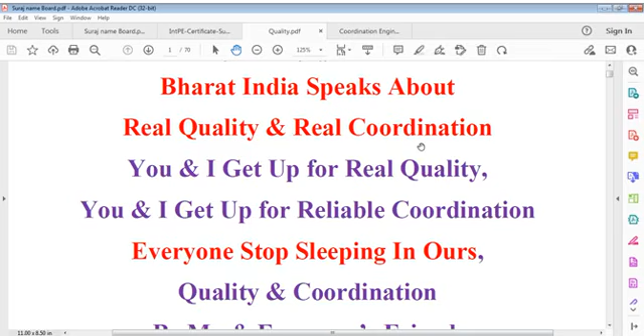It's now quality file Bharat India speaks about. I say every day Bharat India speaks about, but everybody should speak about this because real quality and real coordination are required, and coordination means reliable coordination, engineering projects, public and engineers.

You can say, if we miss real quality, if we miss real coordination, we miss good engineering, and everyone should work on quality. You may be an engineer or otherwise. Quality has to be learned by everybody.

Engineer is born, engineer is supposed to know how to apply quality, and before application one has to know what is the criteria of quality in whatever activity is involved.

We should not stop bad quality. We should stop it. We should question, should we stop or not stop? Answer is we have to stop bad quality.

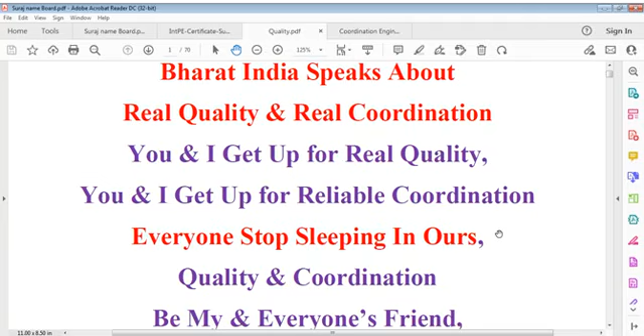We have to start converting every good to good quality before it is being produced. Because without quality your good has got no value. If you don't produce quality goods, there is no export value.

People won't require it. Maybe once they buy your product, keeping in view it's cheaper, or saying let us try, it's like that. But remember, you have to build trust among your customers, and if you do not earn trust, you won't have any market in future.

Trust travels long distance, while mistrust does not travel any distance. Remember, trust travels long distance. Just like a long distance horse race, a horse that can race for long distance - a short distance race has got no meaning.

So everybody should be serious about this issue, because quality and coordination cannot be compromised. Coordination is actually a very much technical engineering activity. Without coordination we cannot do anything.

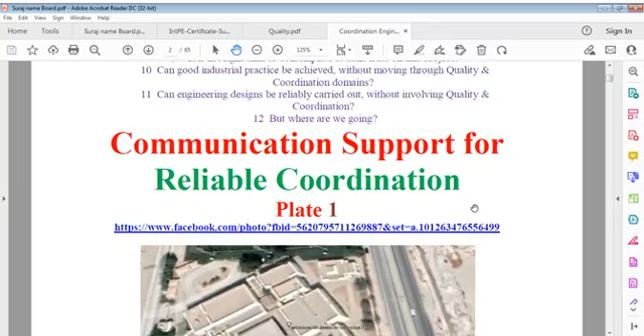The application of information is called quality environment. We fix that, and that's what is required, fixing it. Then we say coordination engineering, as I said before, is communication support, and that is reliable coordination engineering, which is very much important everywhere to be utilized.

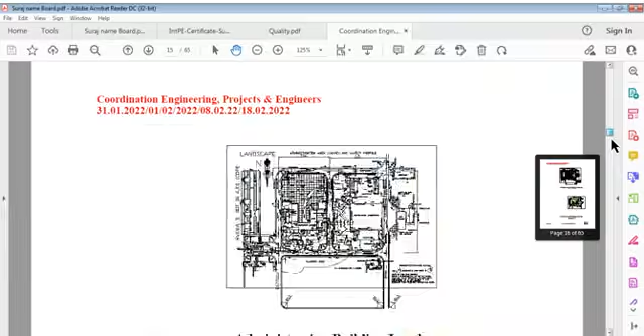It's very easy to say this project has been done, but what's the background of that? That's important - how much work was done, and how much concentration was included. That's a very important point, and that's why I try to explain coordination all the time.

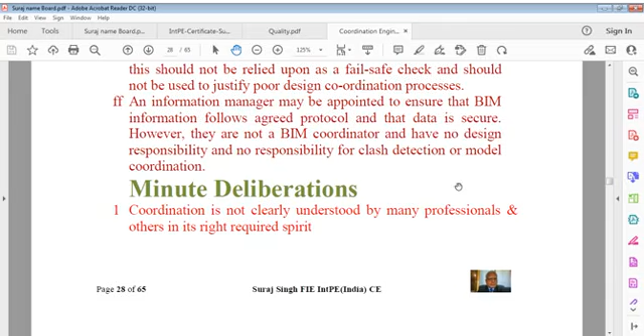Coordination is not clearly understood by many professionals, and its right required spirit is often missed. That point is very important, and the fact remains that without adequate and efficient coordination in professional engineering, works cannot be successfully accomplished.

I can say it shall be right to admit that coordination failure leads to engineering design and construction failure. We have to keep in mind that design and construction failure means complete collapse of the system - everything is lost: material, cost, time, reputation. So everywhere there is loss just for lack of coordination and good engineering information and design.

This means the designer has to be very smart while designing, not confined only to codes or imagination, but should consult people with experience who can give benefit. You should share the benefit of those experiences from people with long experience on sites and works, who know the difficulty while carrying out jobs and activities.

For many engineers I have observed that the issue of coordination remains very delicate, and such engineers try to avoid coordination and its complexity. They just expect someone else to give final working drawings for execution. This means those engineers try to avoid the headache job - they just want complete cooked food for eating.

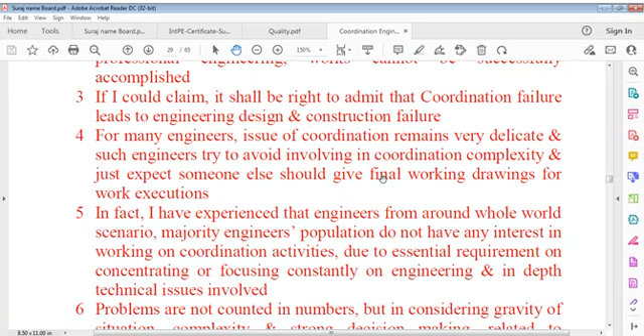This cooking means you give them complete information so that after getting it they study it and hand over the charge to a foreman who can do the job. The issue of coordination is very understandable, and those engineers who can do it are called smart engineers, as far as I know. They should be called smart engineers because it is coordination - as important as taking food.

If you can't take food, you can't work because you don't have energy. The same way, coordination is soul energy, it is spiritual energy for the job. I'm not talking of body's energy, I'm talking of mind energy. Coordination means a fertile mind, coordination means an active mind.

Coordination can be done by those who keep themselves immersed in that work. Once immersion is there, if you find problems, you will certainly get solutions. And if you are not able to get solutions, a specialist will solve it for you, provided that specialist has been given comprehensive coordinated information - that's the sole purpose of coordination.

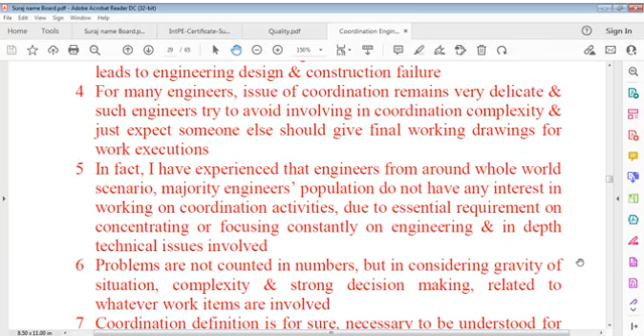I've experienced this from around the world. There are many engineers, and I can say the major population of those engineers do not have any interest in working on coordination activities, due to their respective interests or essential requirements of concentrating and focusing constantly on engineering and in-depth technical issues. These problems cannot be counted in numbers, but in considering the gravity of whatever work items are involved.

The definition of coordination is for sure necessary to be understood for its real meaning, so that no mixing results. You should remember that coordination is done in every profession, in every field - the way may be different, the points may be different.

Where coordination is not done, inefficiency comes in. Nobody knows how work shall be done, so they just beat about the bush and don't come to a point. This means time is lost. You do not know what to do, you keep having meetings, you don't consult the respective or linked person, and then you want to reach agreements. If you try to reach agreement without that, it will be futile work because you do not know what to do. By doing coordination, you will find every required information is available.

And if something is not available, then you can raise that issue. This information must be procured from whatever reliable source. Coordination's definition is for sure necessary to understand. That's how we can understand this.

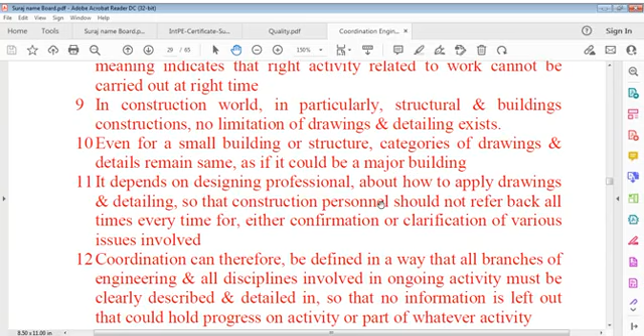That's why being a good practitioner, one should be clear about what is to be done, and coordination is a way. Of course it requires some input from the engineer, but that input is beneficial because it helps you do work faster. And sometimes there are activities which are in parallel to current activities or which are dependent in sequence, and you do not understand what will happen or which will come first. But because you have studied it properly and consulted with the people who will work on it, that dilemma of what to do does not exist.

For coordination therefore, we can say it depends on the designing professional also about how to apply drawings and detailing, so that construction personnel should not refer back all the time, every time, for either confirmation or clarification of various issues involved.

We can say in that case coordination can therefore be defined in a way that all branches of engineering and all disciplines involved in the ongoing activity must be clearly described and detailed, so that no information is left out that could hold up progress on the activity or part of that activity.

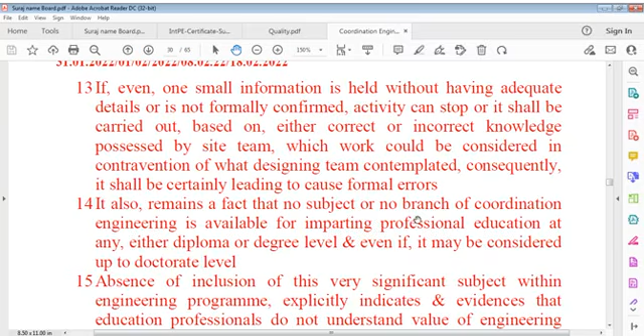If even one small piece of information is held without having adequate details or is not formally confirmed, activity can stop, or it shall be carried out based on either correct or incorrect knowledge possessed by the site team - work which, if done, could be considered in contravention of what the designing team contemplated. Consequently, it shall certainly lead to formal errors. And errors are not positive - errors mean loss of something.

It also remains a fact that no subject or branch of coordination engineering is available for imparting professional education at any diploma or degree level, even up to doctorate level, but coordination is independent of all that. It is a requirement, not a privilege. It's a requirement, it's a mandate.

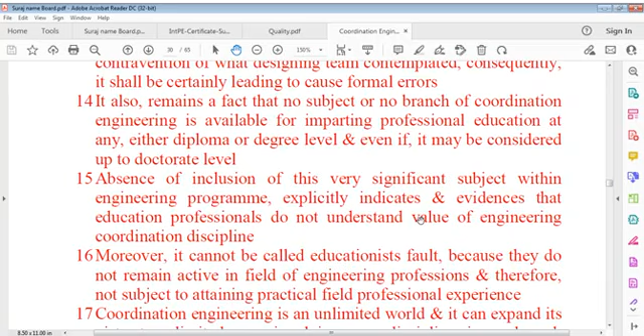It's an understandable mandate, a procedural mandate, and this is very much technical, very much engineering based, and can be logic only - no hypothesis, no imagination. Whatever information we get should be logical, based on some factors. So we can say the absence of inclusion of this significant subject within engineering programs explicitly indicates and evidences that education professionals do not understand the value of engineering coordination as a discipline. I won't say it's the fault of someone, I don't want to go into that.

Coordination - engineering is an unlimited world. It can expand its vistas to unlimited areas, involving many disciplines in one branch of engineering, and also importing various branches of engineering depending on what class of work it is.

And particularly when we deal with contracts, it's very important, because signing a contract is one part, but doing or implementing the contract is another part. There's no specific clause saying you have to do coordination like this - you have to decide yourself and get it in consent with the engineer who is responsible for whatever procedure.

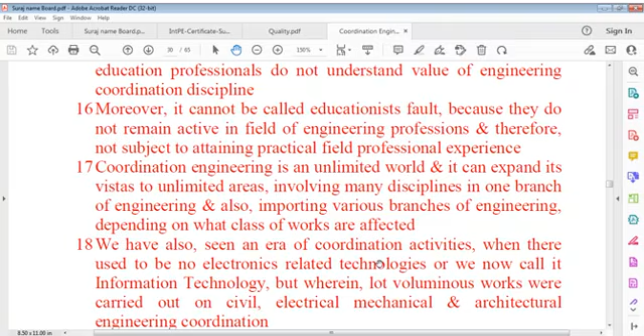Once what you want to do is clear, it can be done easily if it is well understood, and that information can be given to whosoever is responsible for carrying out the job. That's a very important point, particularly on construction or design contracts. There may be design defaults or design faults, and we have to go through that — not to punish someone, but to see that work is done safely and securely, with no repetition. Repetition means you break something and make it again. It doesn't work, and that's why coordination is a very important part in life.

You have to be very careful, and a coordination engineer would have been appointed had the incumbent professional been experienced on a considerable size project site. A professional having just one engineering discipline's knowledge could not be successful for efficient working on site, and progress is consequently either marred or errors are caused.

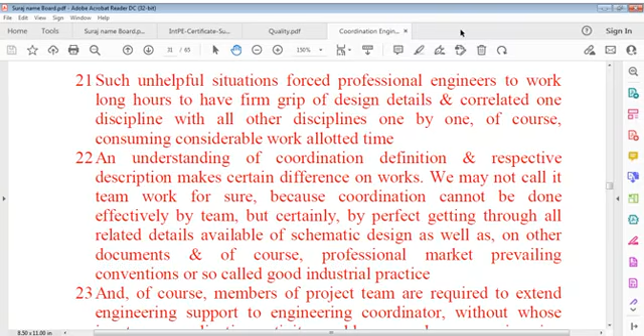Such an unhelpful situation forces professional engineers to work long hours to have a firm grip of design details, correlating one discipline with other disciplines one by one, consuming considerable allotted work time. Understanding coordination's definition and respective description makes a certain difference.

Works cannot be done effectively by a team except by getting a perfect grip through all related details available in schematic designs as well as other documents, and of course the professional market's prevailing conventions, or so-called good industrial practice.

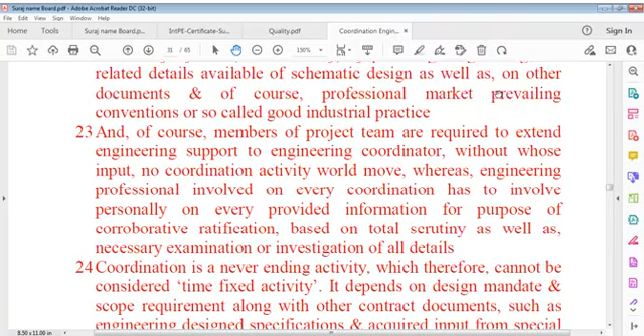Members of the project team are required to extend engineering support to the engineering coordinator, without whose input no coordination activity will move. The engineering professional involved in coordination has to be involved personally in every piece of provided information, for corroborative ratification based on total scrutiny, examination, or investigation of all details. Coordination is a never-ending activity which cannot be considered a time-fixed activity.

It depends on the design mandate and scope requirement, along with other contract documents such as engineering design specifications, and acquired input from special materials and manufacturers, such as documented instructions and material data studies. The complexities of technicalities and structure of resources have certainly created additional complexities.

When many disciplines or branches of engineering work together, it forces attention from the coordinating professional to look into all requirements — contract-related, industry-related, as well as codes-mandate related. In fact, coordination at a higher level of responsibility is always a voluminous task.

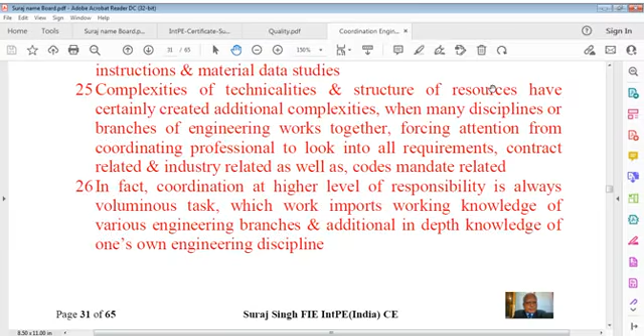This work imports working knowledge of various engineering branches, plus additional in-depth knowledge of one's own engineering discipline. It's also true that in the current engineering and advanced project scenario, just depending on certain proclaimed software may not be absolutely assistive to automatically resolve details pertinent to various conflicts among disciplines. Therefore, no blind eyes can be allowed to thrust the outcome of various conflicting details into physically workable solutions.

As many items or components of whatever project invite an equivalent, additional, or augmentative level of coordination for all such designs and their respective detailing applications.

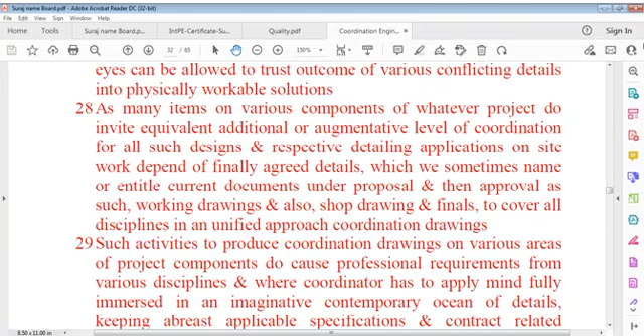On-site work depends on finally agreed details, which we sometimes name or entitle current documents — under proposal and then approval — as working drawings, shop drawings, and finally, to cover all disciplines in a unified approach, coordination drawings.

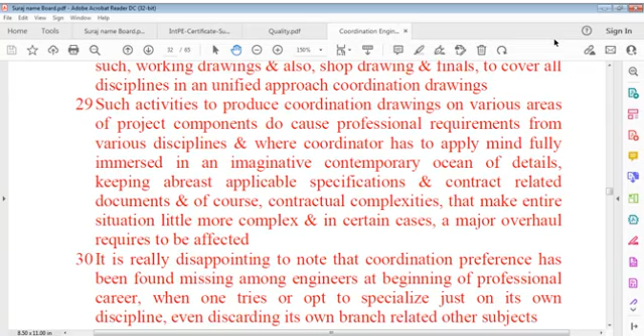Such activities to produce coordination drawings on various areas of project components require the coordinator to apply his mind, fully immersed in an imaginative, contemporary ocean of details, keeping abreast of applicable specifications and contract-related documents. Contractual complexities make the entire situation a little more complex, and in certain cases a major overhaul is required to be effected.

It is really disappointing to note that coordination preference has been found missing among engineers at the beginning of their professional career, when one tries or opts to specialize just in its own discipline, even discarding its own branch-related other subjects.

It's of course necessary for a professional to attain a certain specialization level, but simultaneously one must move on parallel tracks with the remaining disciplines and certainly try to join with other engineering branches, overlapping them.

At this stage of conferring, I shall like to infer with entitled terms such as specialist engineers, managers, organizers, as well as others.

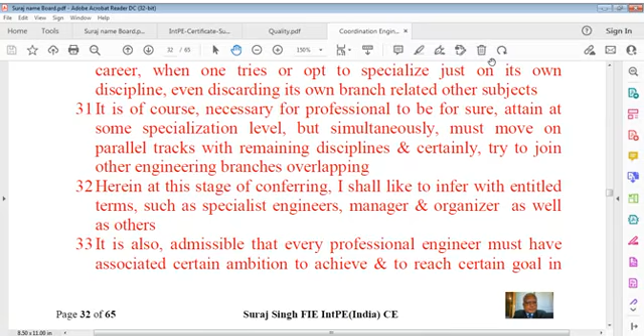It's also admissible that every professional engineer must have a certain ambition to achieve and to reach a certain goal in the professional world. But that does not mean such a professional shall have to leave all other aspects that apply within the profession for cohesive working.

Focus should not find any final stop, but continuation of specialization and then additional working specialization, as major requirements in the engineering profession, because engineering cannot be replaced or overtaken by any other non-engineering professional.

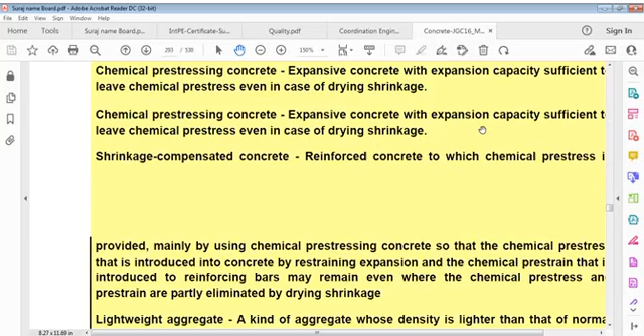First time, now let me see the time factor also. It's about 22 minutes only. Oh, it is. 48 minutes, I'm sorry, there's some error here. Still signals being problematic, some signals again came.

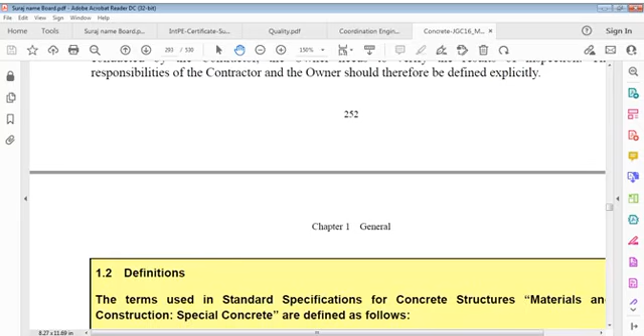So here I give you some definitions. It's page 293. Let me see what's written. Constructing special concrete, discussed on materials and construction. Special concrete frequently requires professional skills. It is stipulated that special concrete should be constructed under guidance of professional engineers with adequate knowledge and experience concerning specific types of special concrete.

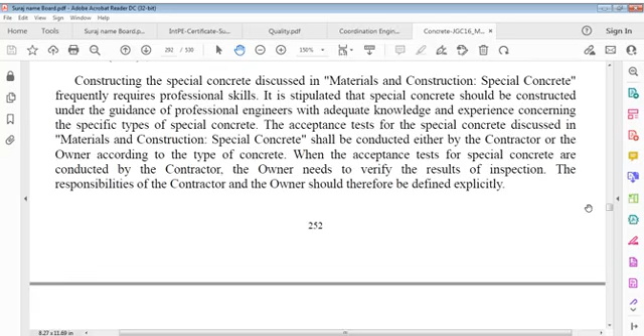Acceptance tests for special concrete discussed in materials and construction. Special concrete shall be conducted either by contractor or owner according to type of concrete. When acceptance tests for special concrete are conducted by contractor, the engineer or owner needs to verify results of inspection. Responsibilities of contractor and owner should therefore be defined explicitly.

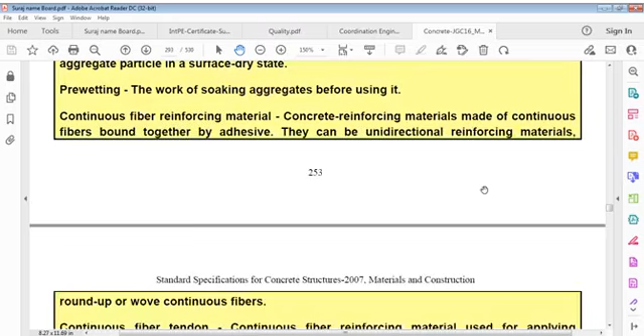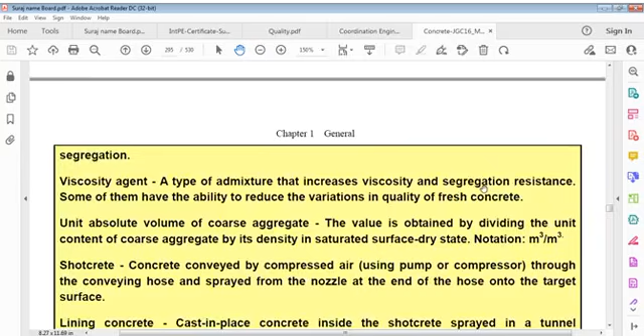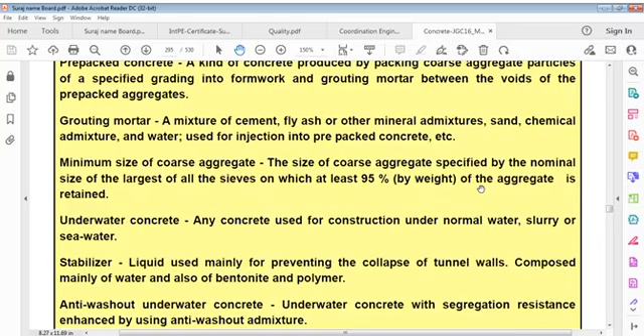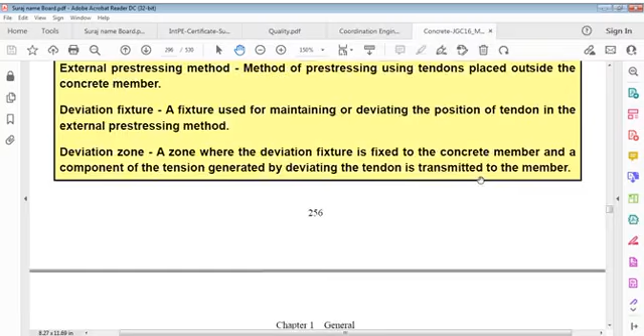Expansive concrete, admixture, chemical pre-stress, chemical pre-strain, shrinkage compensation concrete, chemical pre-stressing concrete, shrinkage compensated concrete, lightweight aggregate concrete, surface dry state of lightweight aggregate, specific gravity of surface dry lightweight aggregate, pre-wetting, continuous fiber reinforcing material, continuous fiber tendon, continuous fiber binder, short fiber reinforced concrete, steel fiber reinforced concrete, synthetic fiber reinforced concrete, short fiber content, steel fiber content, tension, softening curve, explosive fracture, unit volume of dry-rodded coarse aggregate, high fluidity concrete, self-compactability, segregation resistance, flow ability, pass ability, viscosity agent, unit absolute volume, shotcrete, lining concrete, wet spraying, dry spraying, set accelerating agent, percentage of rebound, dust concentration, pre-packed concrete, grouting mortar, minimum size of coarse aggregate, underwater concrete, stabilizer, anti-washout underwater concrete, underwater washout resistance, test piece made in water, test piece made in air, strength ratio of underwater concrete, pre-stress concrete, pre-stressing steel, pre-stress, tendon, duct, sheath, anchorage fixture, pre-tensioning, post-tensioning, grout for pre-stress concrete, internal pre-stressing method, external pre-stressing method, deviation fixture, deviation zone, concrete product, moist curing, insulated curing, accelerated curing, steam curing at atmospheric pressure, autoclave curing, centrifugal compaction, casting, instant demolding, hot concrete.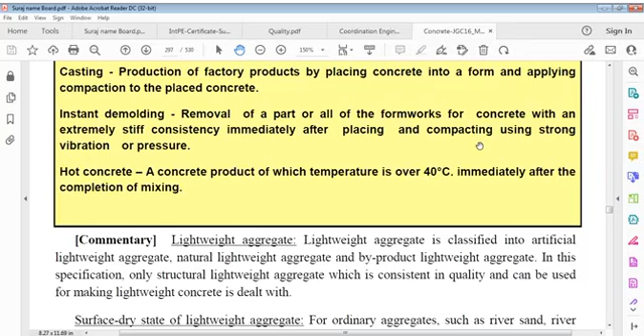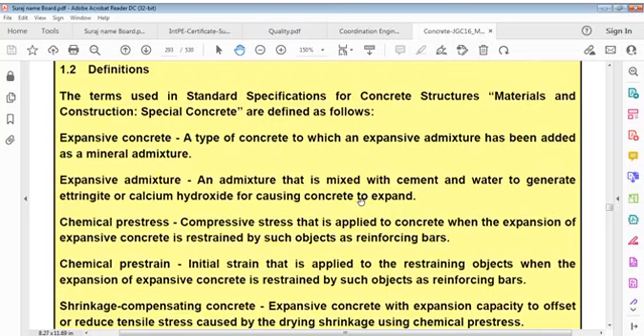Chemical pre-stress is the compressive stress that is applied to concrete when expansion of expansive concrete is restrained by such objects as reinforcing bars. Chemical pre-strain is applied to restraining objects when expansion of expansive concrete is restrained by such objects as reinforcing bars.

Shrinkage compensating concrete is expansive concrete with expansion capacity to offset or reduce tensile stress caused by drying shrinkage, using chemical pre-stress. That is stress shrinkage compensating concrete. Then chemical pre-stressing concrete.

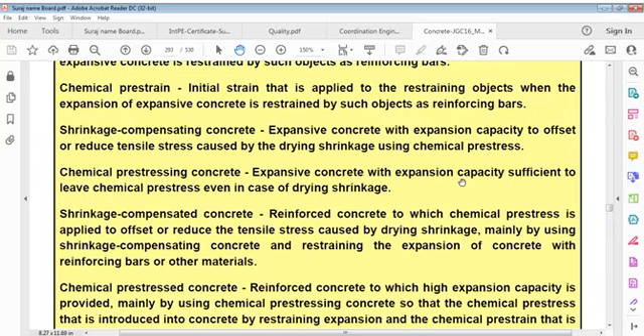Chemical pre-stressing concrete is expansive concrete with expansion capacity sufficient to leave chemical pre-stress even in case of drying shrinkage. Shrinkage compensated concrete is reinforced concrete to which chemical pre-stress is applied.

Shrinkage compensated concrete means reinforced concrete to which chemical pre-stress is applied to offset or reduce tensile stress caused by drying shrinkage, mainly by using shrinkage compensating concrete and restraining expansion of concrete with reinforcing bars or other materials. Chemical pre-stressed concrete is reinforced concrete to which high expansion capacity is provided, mainly by using chemical pre-stressing concrete.

Chemical pre-stress is introduced into concrete by restraining expansion, and chemical pre-strain that is introduced to reinforcing bars remains even where chemical pre-stress and pre-strain are partly eliminated by drying shrinkage.

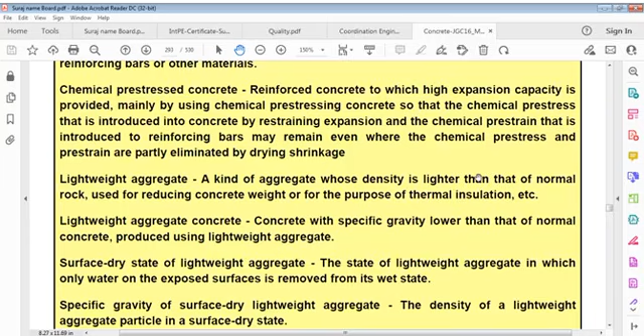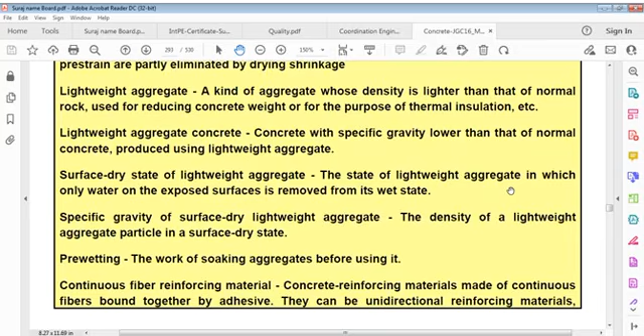Lightweight aggregate is a kind of aggregate whose density is lighter than that of normal rock, used for reducing concrete weight or for purpose of thermal insulation, etc. Lightweight aggregate concrete is concrete with specific gravity lower than that of normal concrete, produced using lightweight aggregate.

Surface dry state of lightweight aggregate is the state of lightweight aggregate in which only water on the exposed surface is removed from its wet state. Specific gravity of surface dry lightweight aggregate is the density of a lightweight aggregate particle in a surface dry state.

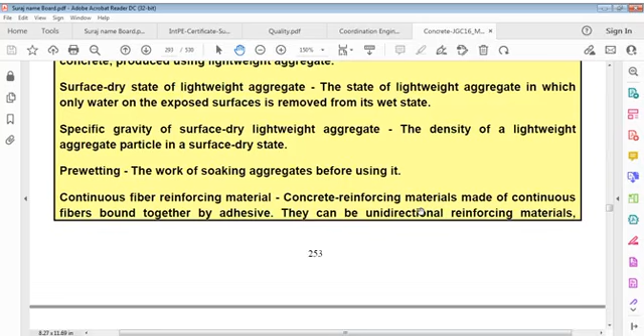Pre-wetting is the work of soaking aggregates before using them. Continuous fiber reinforcing material—pre-wetting, again, was the work of soaking aggregates before using it.

Continuous fiber reinforcing material: concrete reinforcing materials made of continuous fibers bound together by adhesive. They can be unidirectional reinforcing materials, round up, or woven continuous fibers. Continuous fiber tendon is continuous fiber reinforcing material used for applying pre-stress on concrete.

Continuous fiber for reinforcing concrete, such as carbon fiber, aramid fiber, and glass fiber.

Fiber binder that solidifies fibers, plastics such as epoxy resin and vinyl ester resins.

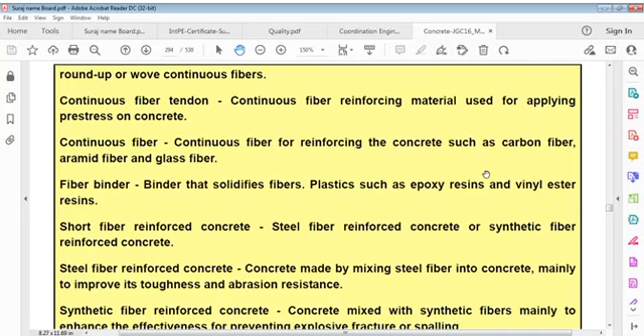Short fiber reinforced concrete, steel fiber reinforced concrete, or synthetic fiber reinforced concrete. Steel fiber reinforced concrete is made by mixing steel fiber into concrete, mainly to improve its toughness and abrasion resistance.

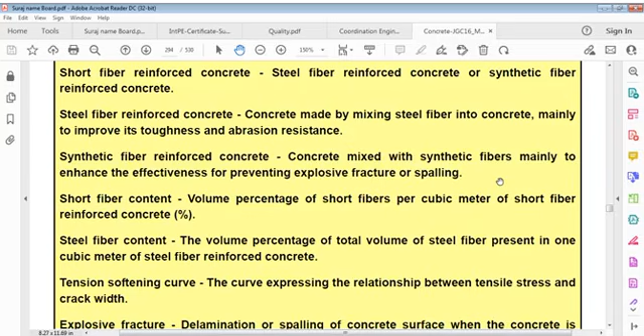Synthetic fiber reinforced concrete: concrete mixed with synthetic fiber, mainly to enhance effectiveness of preventing explosive fracture or spalling.

Short fiber content: volume percentage of short fibers per cubic meter of short fiber reinforced concrete. Steel fiber content: volume percentage of total volume of steel fiber present in 1 cubic meter of steel fiber reinforced concrete. Tension softening curve expresses the relationship between tensile stress and crack width.

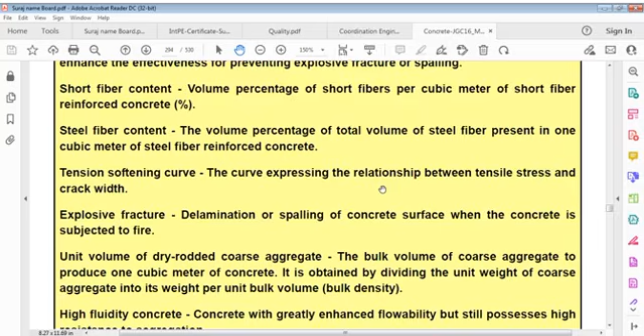Explosive fracture, delamination, or spalling of concrete surface when concrete is subject to fire.

Unit volume of dry rodded coarse aggregate: bulk volume of coarse aggregate to produce 1 cubic meter of concrete. It's obtained by dividing unit weight of coarse aggregate into its weight per unit bulk volume.

High fluidity concrete with greatly enhanced flowability but still possesses high resistance to segregation. Self-compactability: property of fresh concrete to uniformly fill all corners of formwork by its own weight without requirement of external compaction.

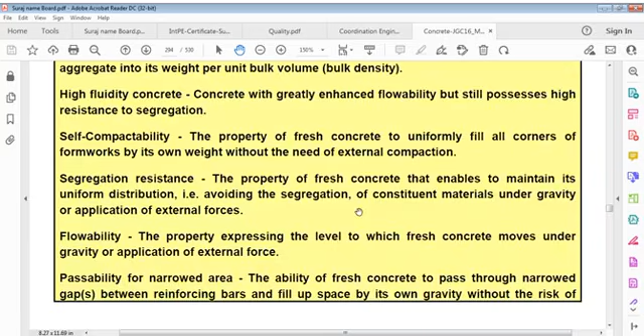Segregation resistance is property of fresh concrete that enables it to maintain its uniform distribution, that is, avoiding segregation of constituent materials under gravity or application of external forces.

Flowability: property expressing the level to which fresh concrete moves under gravity or application of external forces.

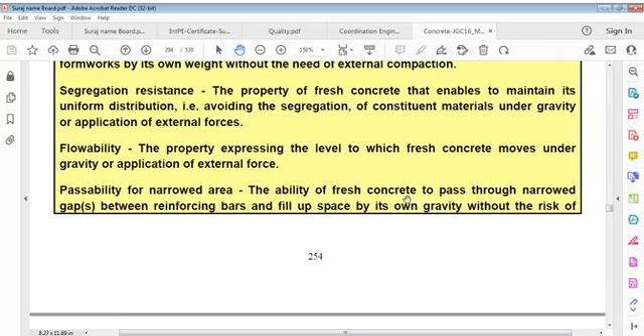Passability for narrowed areas: ability of fresh concrete to pass through narrowed gaps between reinforcing bars and fill up space by its own gravity without risk of segregation.

Viscosity agent: a type of admixture that increases viscosity and segregation resistance. Some of them have the ability to reduce variations in quality of fresh concrete.

Unit absolute volume of coarse aggregate: value is obtained by dividing unit content of coarse aggregate by its density in saturated surface dry state, that is, meter cube per meter cube.

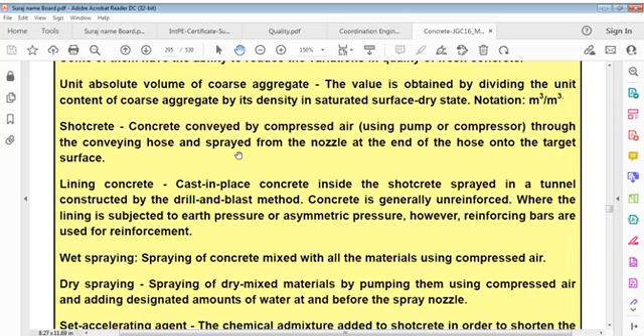Shotcrete: concrete conveyed by compressed air using pump or compressor through conveying hose and sprayed from nozzle at end of hose onto target surface.

Lining concrete: cast in place concrete inside shotcrete sprayed into a tunnel constructed by drill and blast method. Concrete is generally unreinforced where lining is subjected to earth pressure or asymmetric pressure. However, reinforcing bars are used for reinforcement.

Wet spraying is spraying of concrete mixed with all materials using compressed air. Dry spraying is spraying of dry mixed materials by pumping them using compressed air and adding designated amounts of water at and before the spray nozzle.

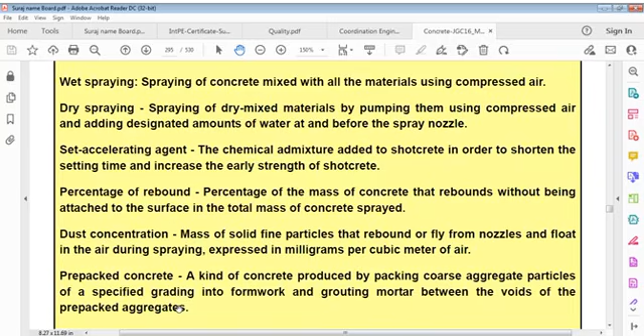Dry spraying is spraying of dry mixed material by pumping them using compressed air and adding designated amount of water before the spray nozzle. Set accelerating agent is chemical admixture added to shotcrete in order to shorten setting time and increase early strength of shotcrete. Percentage of rebound is the percentage of mass of concrete that rebounds without being attached to surface in total mass of concrete sprayed.

Dust concentration: mass of solid fine particles that rebound or fly from nozzles and float in air during spraying, expressed in milligrams per cubic meter of air.

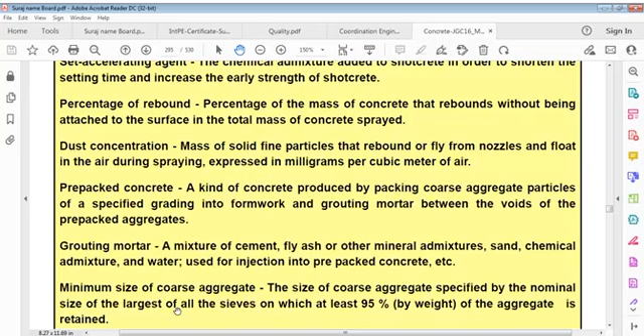Prepared pre-packed concrete: a kind of concrete produced by packing coarse aggregate particles of a specified grading into formwork and grouting mortar between voids of pre-packed aggregate. Grouting mortar: a mixture of cement, fly ash or other mineral admixtures, sand, chemical admixture and water used for injection into pre-packed concrete.

Minimum size of coarse aggregate: size of coarse aggregate specified by nominal size of the largest of all sieves on which at least 95% by weight of aggregate is retained.

Underwater concrete: concrete used for construction under fresh water, slurry or seawater.

Stabilizer: liquid used mainly for preventing collapse of tunnel walls, composed mainly of water and also of bentonite and polymer.

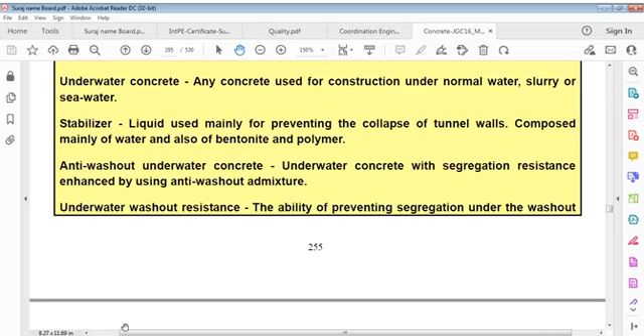Underwater washout resistance: ability of preventing segregation under the washout action of water.

Test piece made in water: test piece made by dropping anti-washout underwater concrete into a mold placed underwater as specified.

Test piece made in air: test piece made by filling anti-washout underwater concrete into a mold in air, as specified.

Strength ratio of underwater concrete to normal concrete: compressive strength of test piece made in water to test piece made in air at the same age.

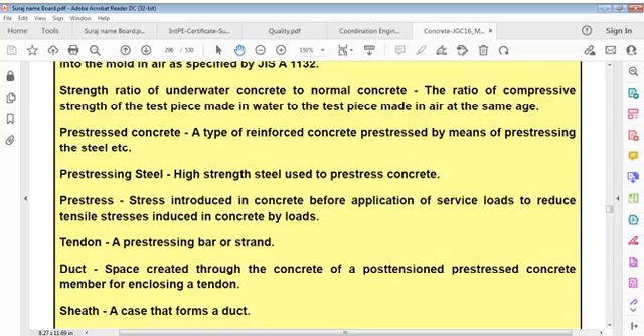Pre-stress concrete: a type of reinforced concrete, pre-stressed by means of pre-stressing steel. Pre-stressing steel means high strength steel used to pre-stress concrete. Pre-stress is stress introduced into concrete before application of service loads, to reduce tensile stresses induced in concrete by loads.

Tendon: a pre-stressing bar or strand. Duct: space created through concrete of a post-tension pre-stress concrete member for enclosing a tendon.

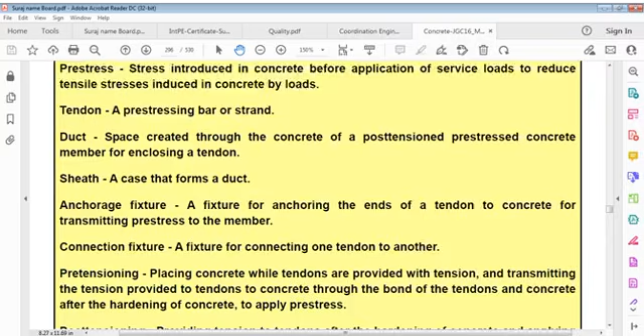Sheath: a case that forms a duct.

Anchorage fixture: a fixture for anchoring ends of tendon to concrete for transmitting pre-stress to the member. Connection fixture: a fixture for connecting one tendon to another.

Pre-tensioning: placing concrete while tendons are provided with tension, and transmitting the tension provided to tendons to the concrete through bond of tendons and concrete after hardening of concrete, to apply pre-stress.

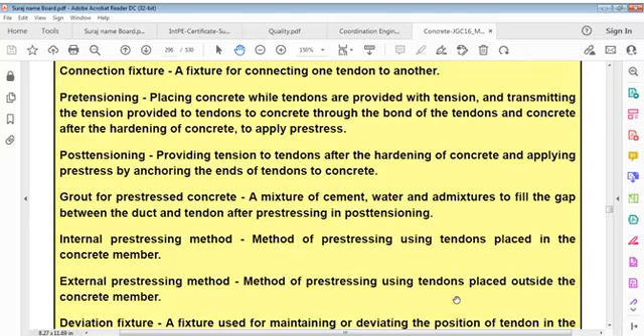Grout for pre-stress concrete: a mixture of cement, water and admixtures used to fill the gap between duct and tendons after pre-stressing in post-tensioning.

Internal pre-stressing method: method of pre-stressing using tendons placed in the concrete member.

Deviation fixture: a fixture used for maintaining or deviating the position of tendon in external pre-stressing method. Deviation zone: a zone where the deviation fixture is fixed to the concrete member, and a component of tension generated by deviating the tendon is transmitted to the member.

Concrete product: precast concrete products manufactured in succession in controlled factories.

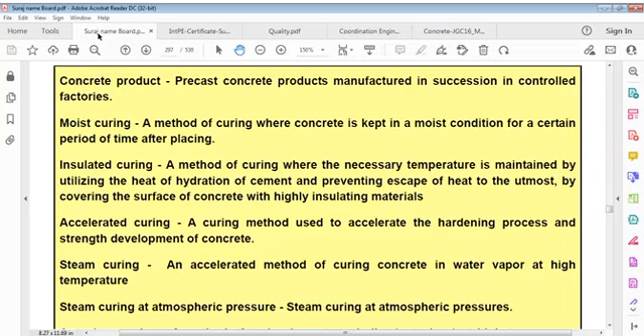Accelerated curing: a curing method used to accelerate the hardening process and strength development of concrete.

Steam curing: an accelerated method of curing concrete in water vapor at high temperature. Steam curing at atmospheric pressure refers to steam curing conducted at atmospheric pressure.

Autoclave curing: a method of curing in a steam boiler, called an autoclave, at high temperature and high pressure. To summarize: steam curing is an accelerated method of curing in water vapor at high temperature; steam curing at atmospheric pressure occurs at normal pressure; and autoclave curing occurs in a steam boiler at high pressure and high temperature.

Centrifugal compaction: compaction of concrete by centrifugal force, using a formwork revolving at an extremely high speed.

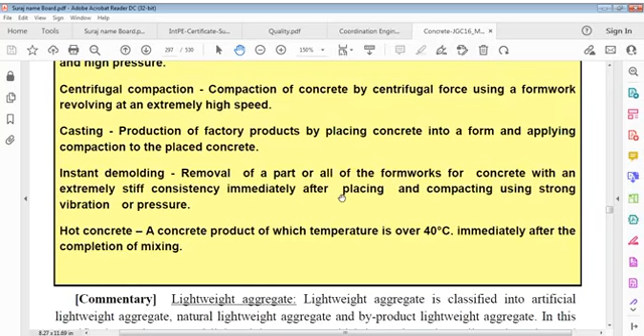Some commentary in this connection: lightweight aggregate is classified into artificial lightweight aggregate, natural lightweight aggregate, and byproduct lightweight aggregate. In this specification, only structural lightweight aggregate, which is consistent in quality and can be used for making lightweight aggregate concrete, is dealt with.

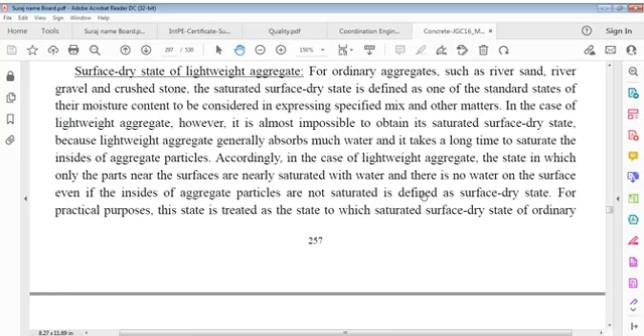Surface dry state of lightweight aggregate. For ordinary aggregates such as river sand, river gravel, and crushed stone, saturated surface dry state is defined as one of the standard states of moisture content to be considered in expressing specified mix and other matters. In case of lightweight aggregate, however, it is almost impossible to obtain its saturated surface dry state.

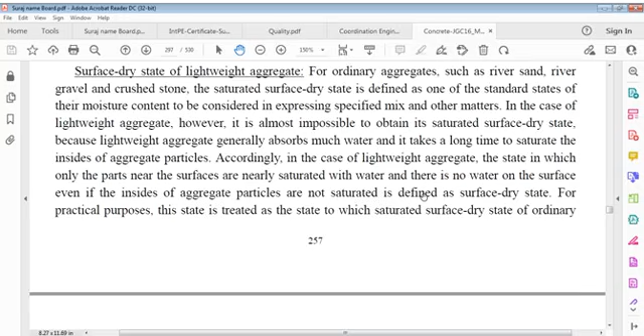Because lightweight aggregate generally absorbs much water and it takes a long time to saturate insides of aggregate particles, a state in which only parts near surfaces are nearly saturated with water, with no water on the surface, even if the inside of aggregate particles are not saturated, is defined as surface dry state. For practical purposes, this state corresponds to the saturated surface dry state of ordinary aggregate. Surface dry state of lightweight aggregate is not constant, and it shall be noted that specific gravity in a surface dry state varies depending on degree of water saturation.

Pre-wetting: aggregates in dry state absorb water of concrete during mixing and transporting. In order to minimize the degree of water absorption, it is necessary to conduct work of soaking aggregate in water before using it. This operation is called pre-wetting.

Continuous fiber reinforcing material is the generic name of a material made of continuous fibers tied together by fiber binder for use as reinforcing material in concrete instead of steel bars or pre-stressing tendons. Continuous fibers include carbon fiber, aramid fiber, glass fiber, or Vinylon fiber.

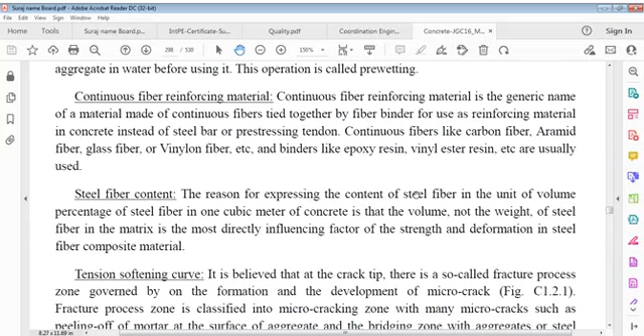Steel fiber content: the reason for expressing content of steel fiber in unit of volume percentage of steel fiber in 1 cubic meter of concrete is that volume, not weight, of steel fiber in the matrix is the most directly influencing factor of strength and deformation in steel fiber composite material.

Tension softening curve. It is believed that at the crack tip there is a so-called fracture process zone governed by the formation and development of micro cracks. The fracture process zone is classified into a micro cracking zone with many micro cracks, such as peeling of mortar at the surface of aggregate, and a bridging zone with aggregates or steel fibers laying across the crack.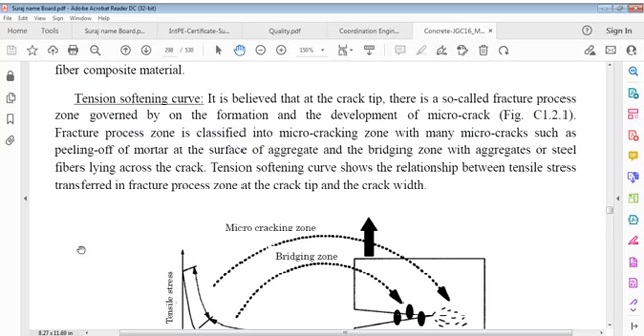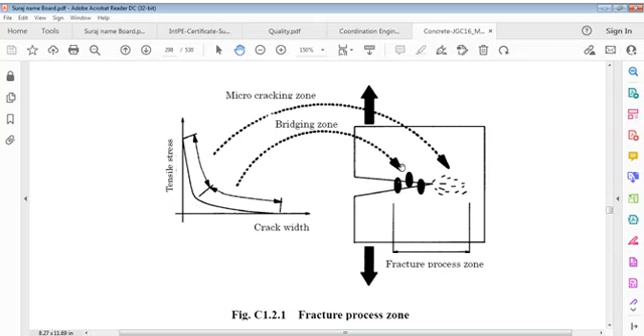Tension softening curve shows the relationship between tensile stress transferred in the fracture process zone at the crack tip and crack width. As crack width increases, tensile stress decreases; least width means highest tensile stress. There are two zones: the micro cracking zone and the bridging zone, both within the fracture process zone.

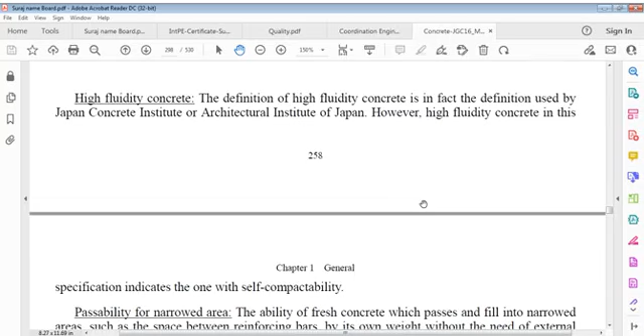High fluidity concrete: the definition is in fact the one used by the Japan Concrete Institute or Architectural Institute of Japan. However, in this specification, high fluidity concrete indicates one with self-compactability.

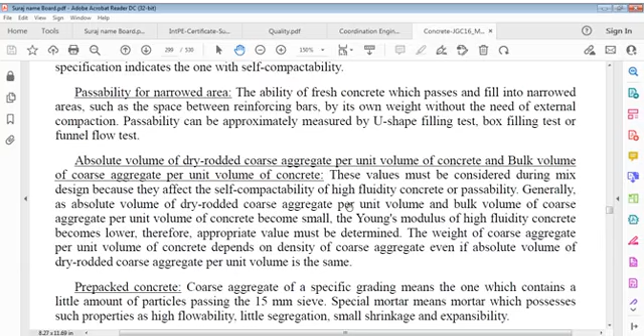Passability for narrow areas: ability of fresh concrete which passes and fills into narrowed areas, such as space between reinforcing bars, by its own weight without need of external compaction. Passability can be approximately measured by the U-shape filling test.

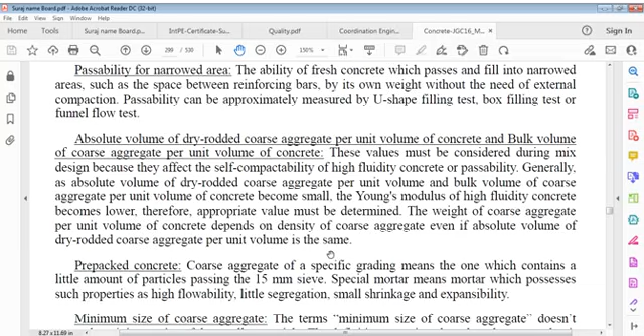Pass ability is the ability of fresh concrete to pass and fill into narrowed areas, such as space between reinforcing bars, under its own weight without requiring external compaction. Pass ability can be approximately measured by U-shape filling test, box filling test, or funnel flow test.

Absolute volume of dry rodded coarse aggregate per unit volume of concrete and bulk volume of coarse aggregate per unit volume of concrete. These values must be considered during mix design because they affect self-compactability of high fluidity concrete, or passability. Generally, as the absolute volume of dry rodded coarse aggregate per unit volume and bulk volume of coarse aggregate per unit volume of concrete become small...

Young's modulus of high fluidity concrete becomes lower. Therefore, an appropriate value must be determined.

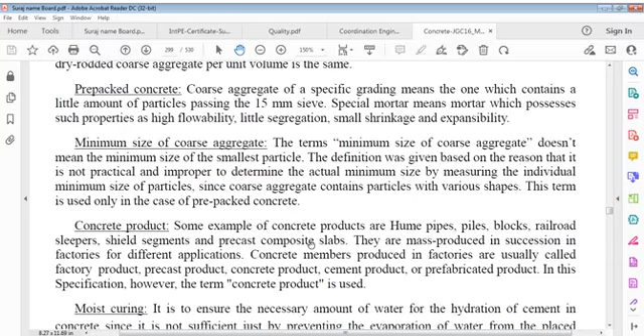Concrete product. Some examples of concrete products are hume pipes, piles, blocks, railroad sleepers, shield segments, and precast composite slabs. These are mass produced in succession in factories for different applications. Concrete products made in factories are usually called factory products.

Precast product, concrete product, cement product, or prefabricated product. In this case, moist curing is to ensure necessary amount of water for hydration of cement is in the concrete system. It's not sufficient just by preventing evaporation of water from placed concrete. This curing method is also effective in preventing cracking due to drying shrinkage during the initial hardening stage.

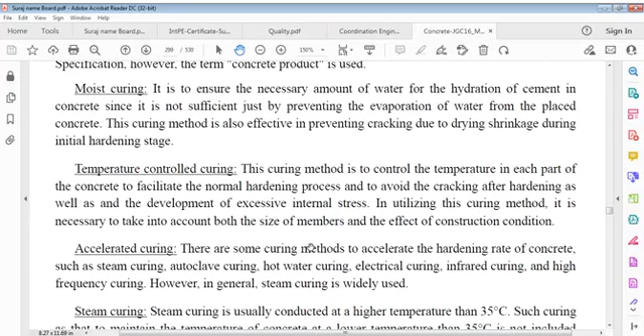Temperature control curing. This curing method controls temperature in each part of concrete to facilitate a normal hardening process and to avoid cracking after hardening, as well as to prevent excessive internal stress. In utilizing this curing method, that is temperature control, it's necessary to take into account both sizes of members and effects of construction conditions.

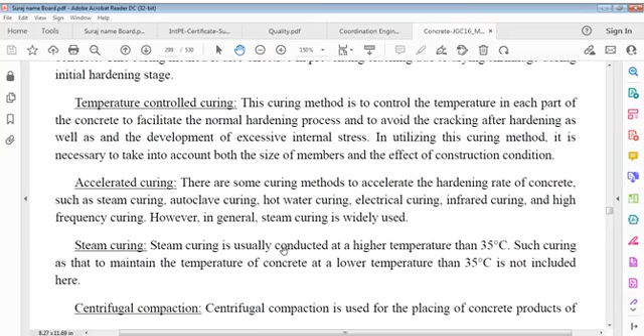Accelerated curing. There are some curing methods to accelerate hardening rate of concrete, such as steam curing, autoclave curing, hot water curing, electrical curing, infrared curing, and high frequency curing. However, in general, steam curing is widely used. Steam curing is usually conducted at a temperature higher than 35 degrees; maintaining concrete temperature below this is not included here.

Centrifugal compaction is used for placing concrete products of hollow cylinders such as poles, piles, pipes, and so on. The effect of centrifugal compaction is related to the magnitude of force originated by revolution of the formwork. Acceleration of the centrifuge usually ranges up to 20 to 40 g.

Casting in production of concrete. In production of concrete products, the process of placing concrete into formwork and then providing compaction to the placed concrete is called casting, while stripping the formwork is called demolding. Hot concrete at a temperature of 40 to 60 degrees Celsius is used to place in a formwork and remove the formwork in a short time after hot curing.

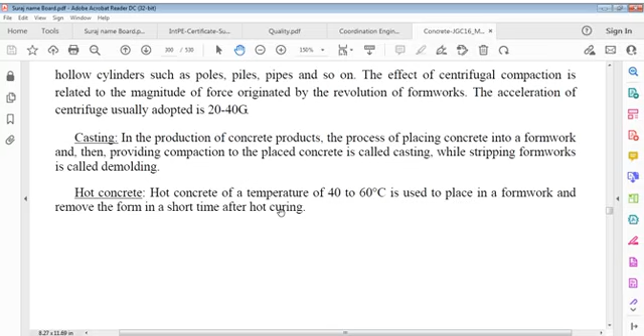Expansive concrete. Expansive concrete specifications set standards on essential matters particularly required for achieving required qualities and performances of expansive concrete. Expansive concrete referred to in this chapter includes shrinkage compensating concrete and concrete for chemical prestressing. Expansive concrete is a general term for a type of concrete which consists of expansive admixture mixed together with cement, water, fine aggregate, coarse aggregate, and other admixtures, and which produces volume expansion even after the start of hardening.